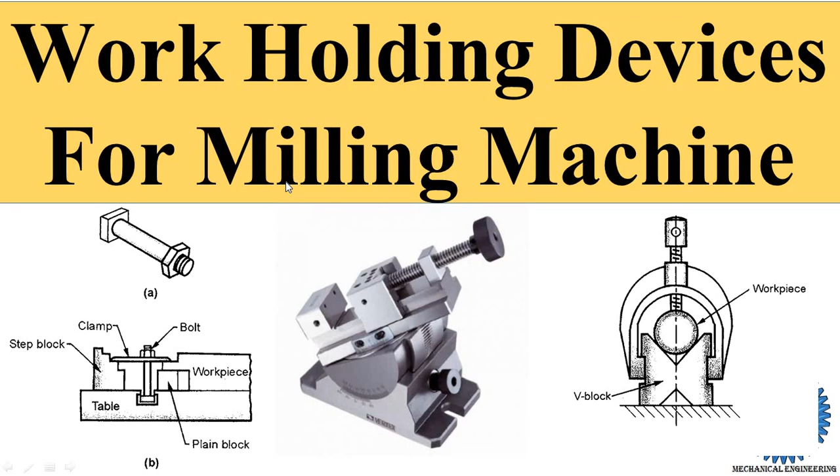Why is proper work holding required? For effective machining operation, it is necessary that the workpiece should be properly and securely held on the milling machine table. If the workpiece is not properly held, then the accuracy of cutting is reduced and other problems are created. That's why proper holding of the workpiece is required, and a number of methods are used for this.

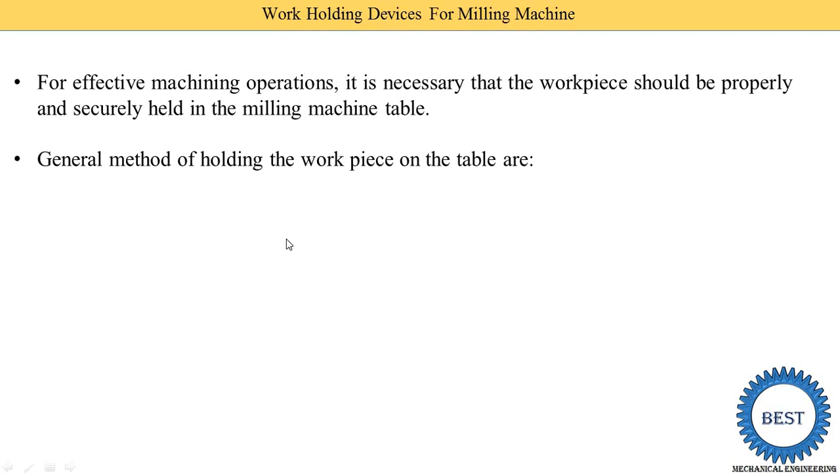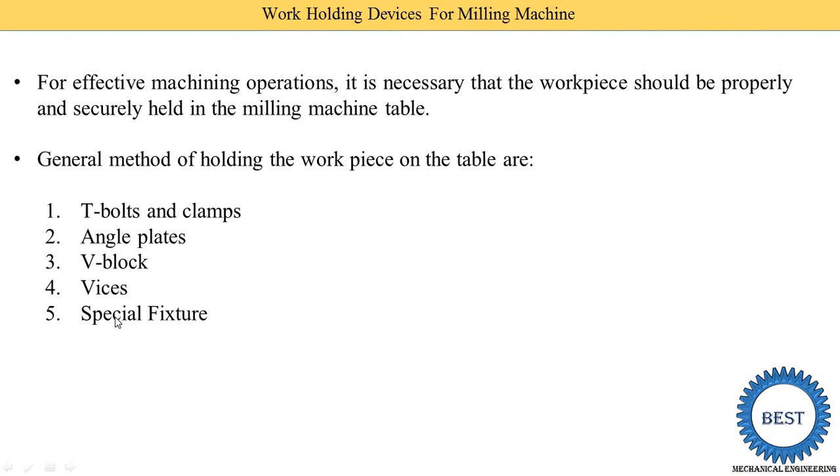First is the T-bolt and clamp. Second is the angle plate. Third is the V-block. Fourth is the vise—a number of types of vise are used, which we study in detail. The last one is special fixtures, and we also discuss why special fixtures are used. For better understanding, watch the video to the end.

Now first we understand the T-bolt and clamp. Here you see the image of a T-bolt. T-bolt means the head of the bolt looks like a square when viewed from this side. Here is the table, and on the table we provide T-slots. On this T-slot we put the T-bolt, and this clamp is used.

Here you see the workpiece. A plain block is put according to the shape of the workpiece. T-bolt and clamp are generally used for holding irregularly shaped workpieces. This is the step block and this is the clamp. So why is T-bolt and clamp used? For bulky workpieces, meaning larger shapes, or irregular sizes where the shape and dimensions are uneven, these are directly clamped on the milling machine table with the help of T-bolt and clamp.

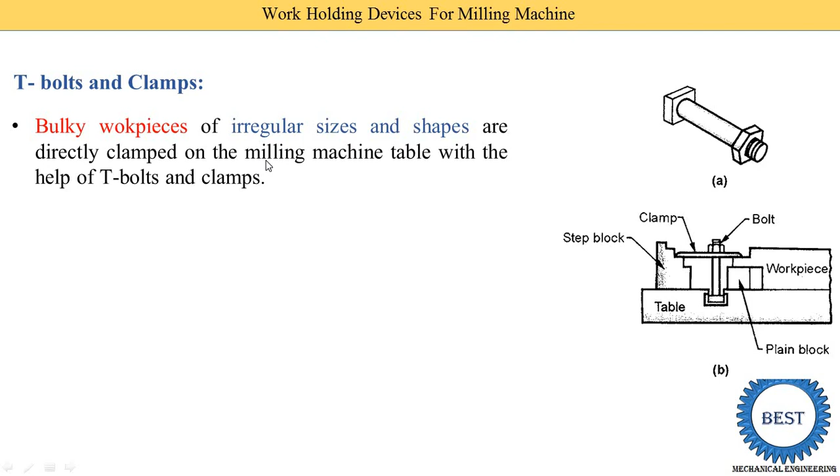The diameter of these T-bolts generally ranges from 15 to 20 mm. Different designs of clamps are used for different patterns of work, meaning the clamp has different designs depending on the pattern of the workpiece. If the shape of the workpiece changes, then the shape of the clamp also changes. We are also required to put this type of step block according to the height of the workpiece, so the dimension of the step block also changes.

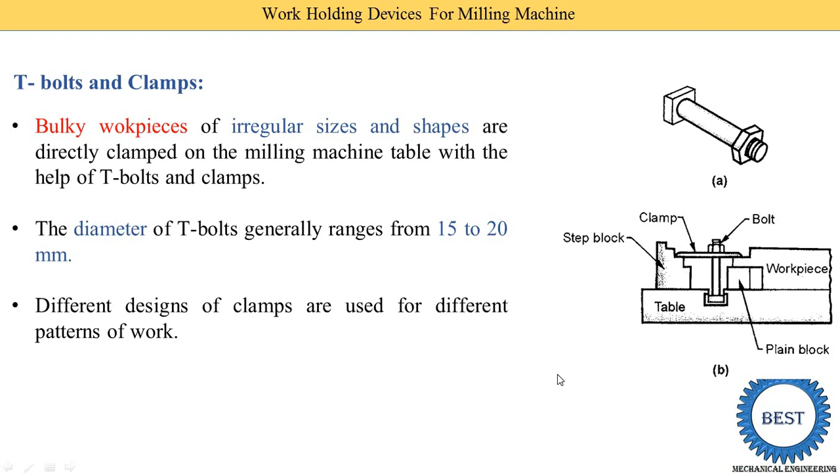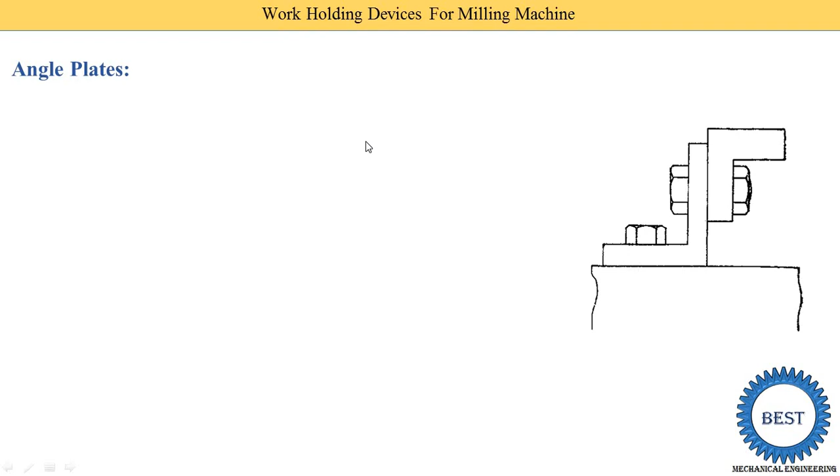Now the second component is the angle plate. Its name suggests that the angle plate is used when we need to mount something at an angle. When the work surface is to be milled at right angles to another face—this is one face and this is the second face, here is our angle plate, this is the workpiece—we require performing the operation at right angles to another face, meaning this face is at right angles to the other face, and this surface is used for supporting the work.

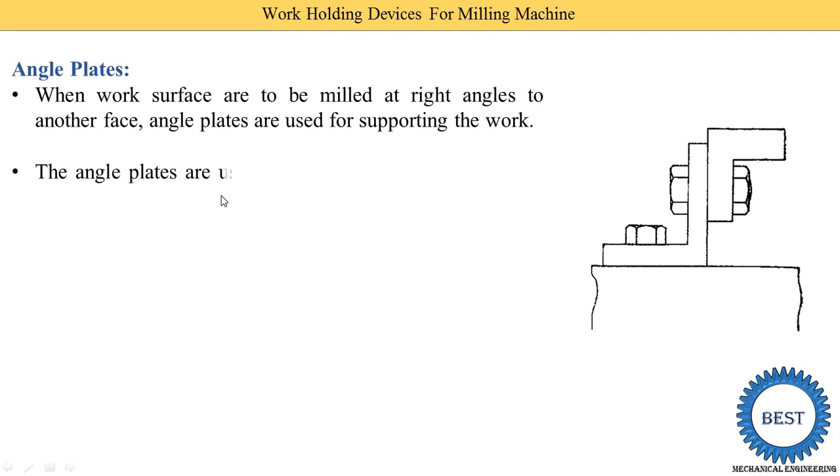The angle plates are usually made of cast iron, having two faces at right angles to each other. So this is one face of the angle plate, this is the second face of the angle plate, and this is our workpiece with its own two faces. The faces are accurately finished and provided with holes and slots for clamping the workpiece.

The faces of the angle plate are accurately finished. Here is another image showing that this face of the angle plate contains various holes and slots. In these holes and slots, we put bolts to clamp the workpiece and the angle plate together.

One of its faces rests upon the table and is bolted onto it. So this is the other face of the angle plate, connected to the table using this T-bolt, and this other face contains this type of slots.

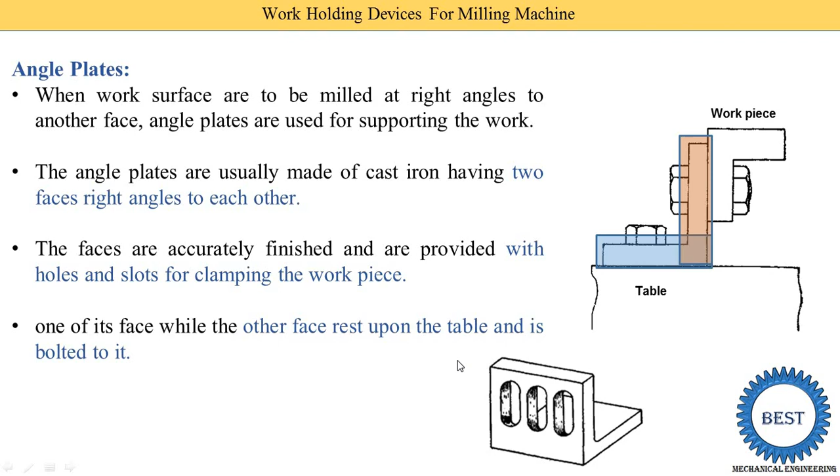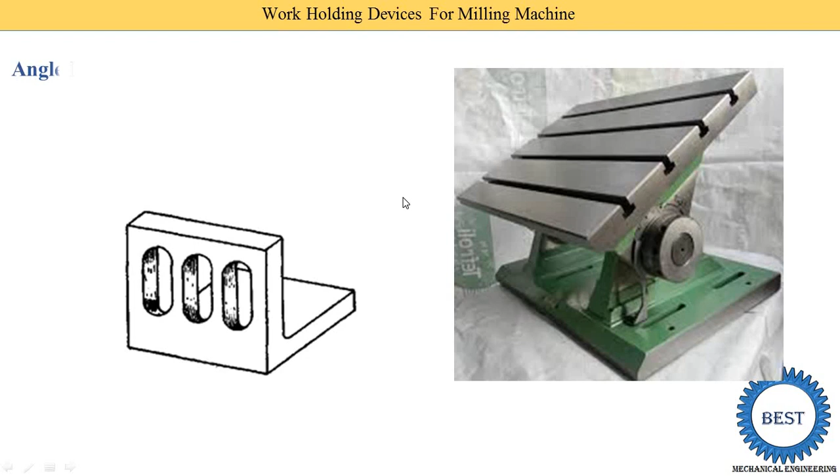Now the third component is the V block. The V block is generally used for holding a round workpiece. Earlier we saw that angle plates and T-bolts are used for irregular shaped and flat workpieces. But when we need operations on an angular or round workpiece, we need to use the V block.

When we use the V block, its shape is V, which is why it's known as the V block. Inside this V block, we can easily mount a round workpiece.

This is the clamp, provided in the upper direction so the workpiece is not able to move up and down. If we simply put the round workpiece in a V block, there is a possibility it could move up and down and also slide. That's why we require a clamp, so the workpiece is not able to move in any direction.

The work may be supported on two or three V blocks and clamped against them by a strap and bolt. This means it is not enough to use just one V block when the length of the workpiece is higher; at that time we are required to use two or three blocks along the length, bolted with a strap and bolt.

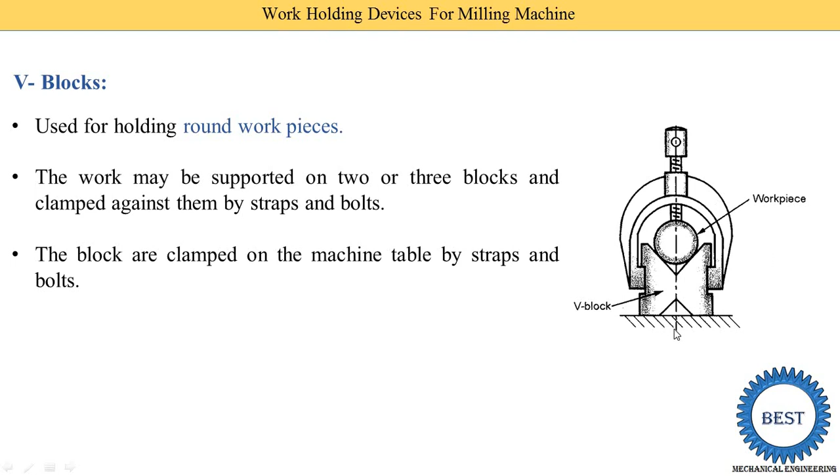The blocks are clamped on the machine table by straps and bolts, meaning the block is not simply placed on the table. We require a strap with a bolt to secure it, so that the V block is also not able to move.

These V blocks are provided with a tongue at their base, which fits into the table and prevents any sideways movement of the block. So the block is not able to move in any direction due to the use of the tongue, which is provided on the bottom part of the V block.

Accurately machined cast iron or steel blocks, meaning the V blocks are made from cast iron or steel.

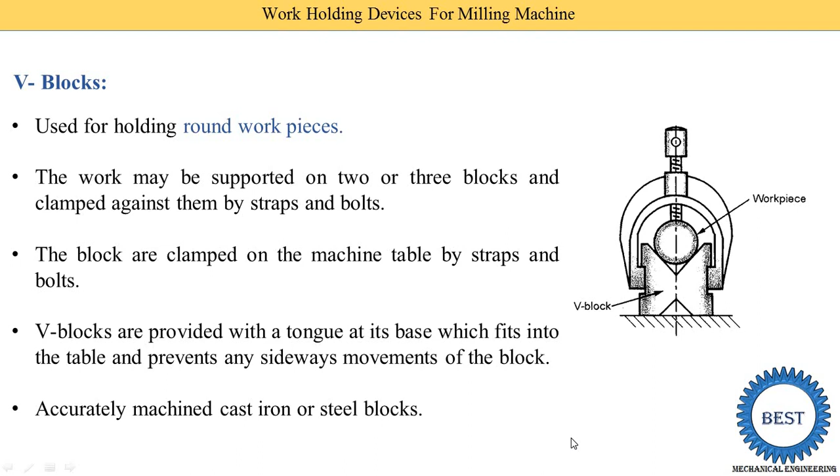The next component is the vise. The vise is generally used for holding the workpiece on milling machines, and vises are a commonly used work holding device. The following are the types of vise commonly used: first, the plain machine vise; second, the swivel vise; and third, the universal swivel vise.

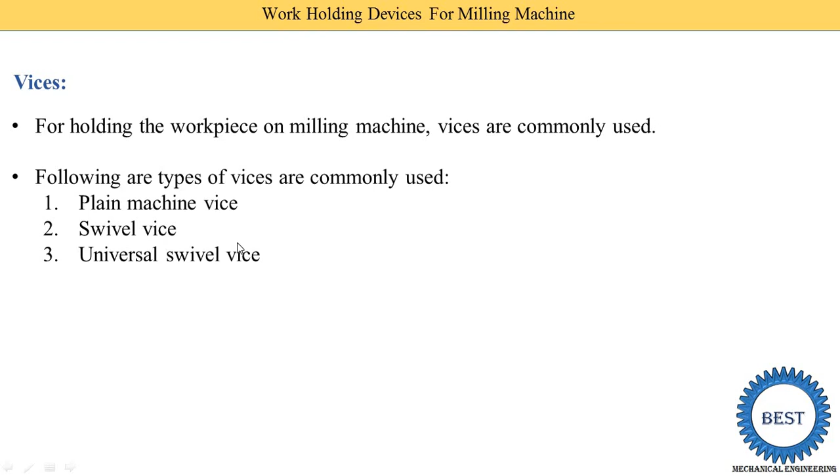Now we understand all three types of the vise in detail. First one is the plain vise. The plain vise is directly bolted on the milling machine table.

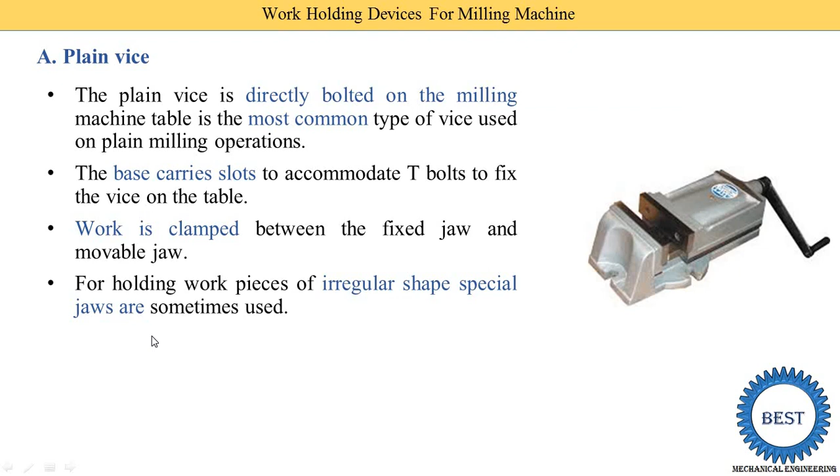In between the fixed jaw and the moving jaw we put our workpiece. For holding workpieces of irregular shape, special jaws are sometimes used. So if the shape of the workpiece is irregular, then the design of this jaw is changed.

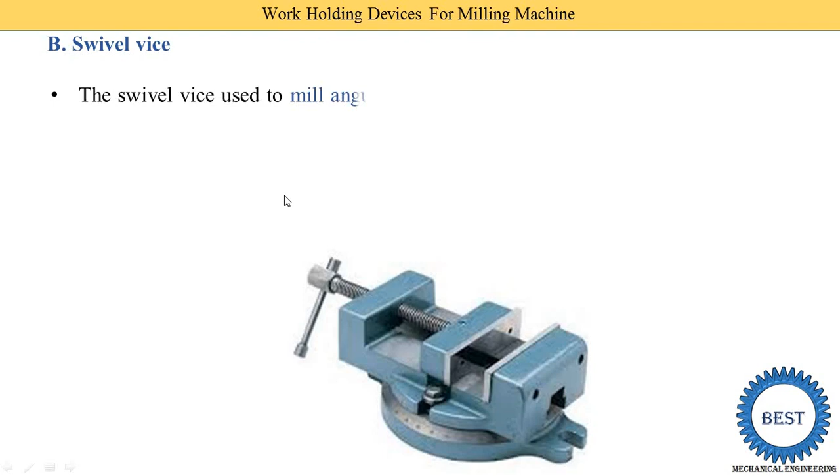Now the second is the swivel vise. The swivel vise construction is similar to the plain vise, but it is used to mill angular surfaces in relation to the straight surface without removing the work from the vise. This means we are changing the angle of the workpiece when we require to machine it at some angle.

At that time we are required to set the angle of the workpiece without removing it from the vise. So at that time the swivel vise is used.

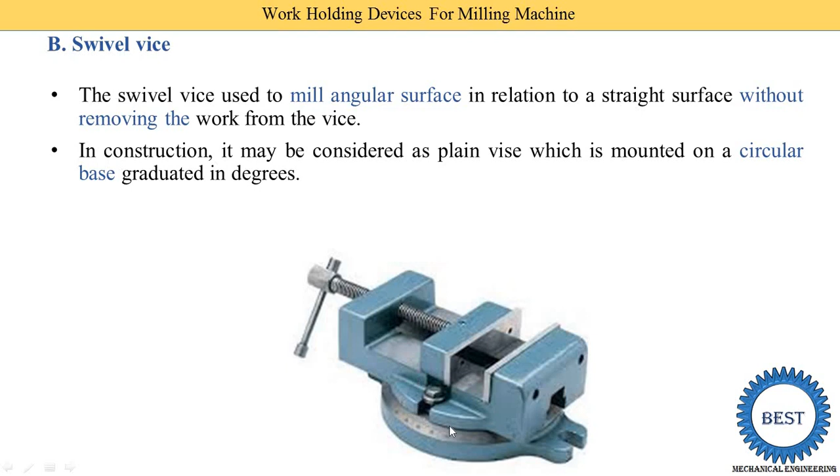In construction, it may be considered as a plain vise mounted on a circular base graduated in degrees. So this is the plain vise that we studied earlier, but now it is mounted on a circular base. In the circular base there is a degree scale provided, so from that we are able to rotate this vise. That's why it is known as the swivel vise.

The base is clamped on the table by means of T-bolts. Here you see one slot, and another slot is also provided on this side, so it is mounted on the table using these T-bolts. This is the fixed jaw, this is the moving jaw, and this is the handle. When we rotate this handle, the moving jaw moves in these directions, and a guide is provided for the movement of the movable jaw.

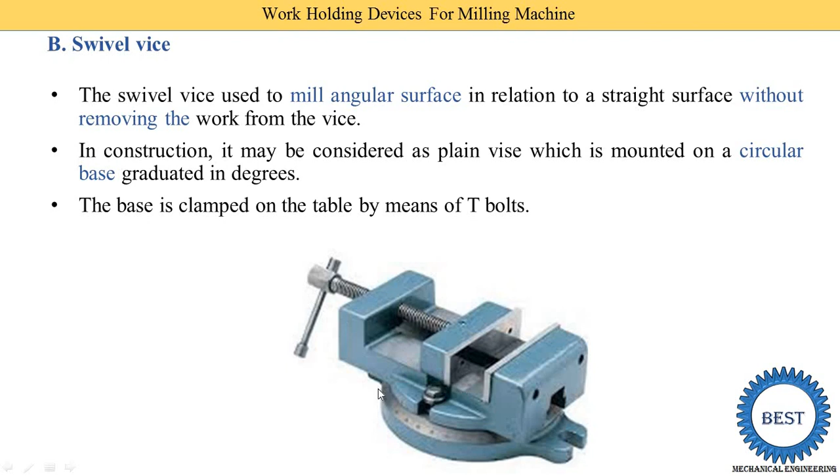Next is the universal vise. Here you see the image of this universal vise. It can be swiveled in a horizontal plane similar to the swivel vise, and can also be tilted in any vertical position for angular cuts. This means it can change angles both horizontally and vertically.

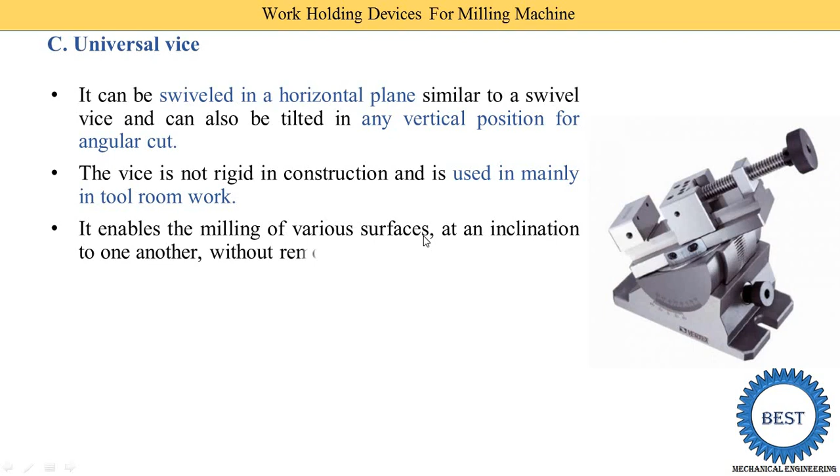The vise is not very rigid in construction, meaning not very strong, and it is mainly used in tool room work, generally for making various types of tools. It enables the milling of various surfaces at inclinations to one another without removing the workpiece, making it possible to perform various operations at different inclinations without removing the workpiece.

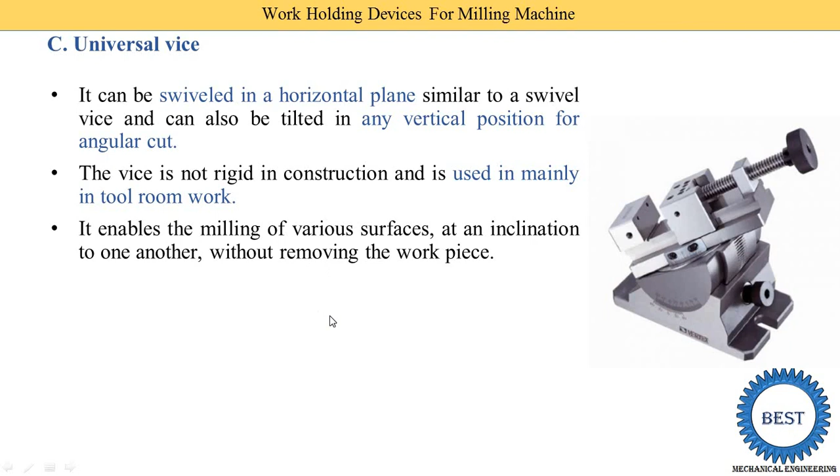The last one is special fixtures. Fixtures are special devices designed to hold the work for specific operations more efficiently than standard work holding devices. Fixtures are specially designed for one particular type of operation, so they differ for different operations, and are generally used to hold the work for a specific operation more effectively than standard work holding devices.

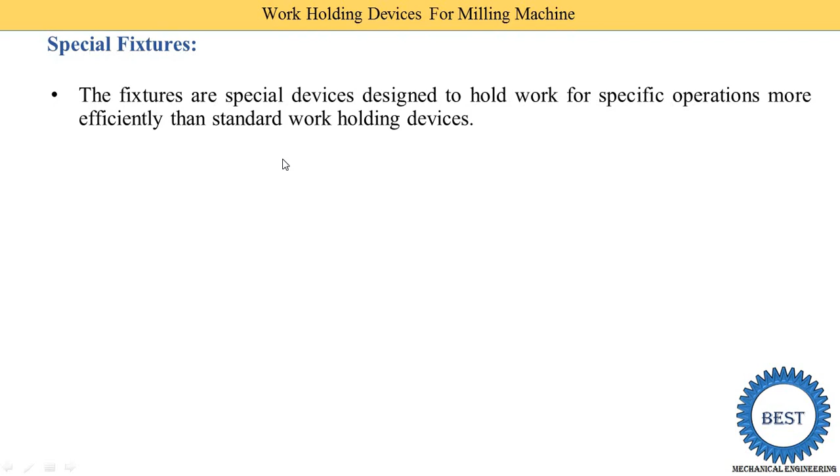Fixtures are especially useful when a large number of identical parts are being produced, meaning the same operations are performed on a number of jobs. At that time special fixtures are used. By using a fixture, loading, locating, clamping, and unloading time is greatly minimized, since fixtures are designed so that we can easily mount the workpiece, reducing the time for loading, clamping, and unloading.